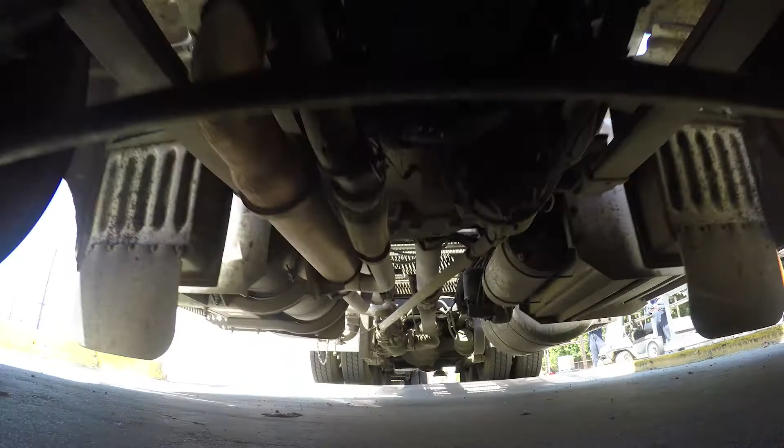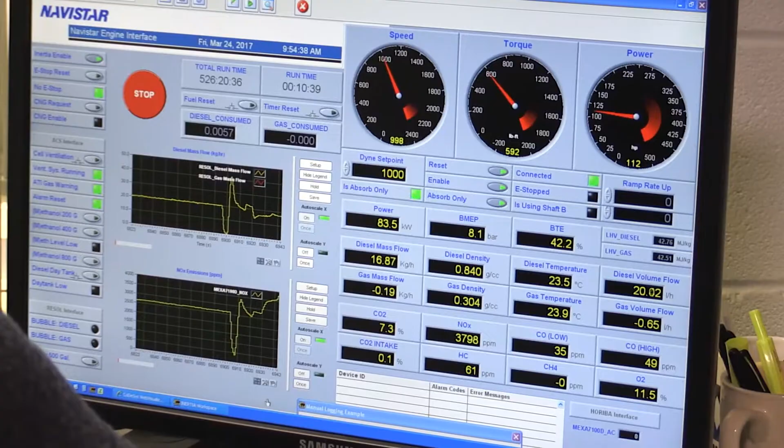And there's a lot of different drivers, both on economic side, interest in terms of environment, and also financial interest. And that's one of the sides that comes with the heavy-duty sector. For example, it's transportation of goods. So there's fuel consumption, and the amount of fuel and what's being consumed by the vehicles represents a cost to the consumer in the end, and also an operating cost for the business.

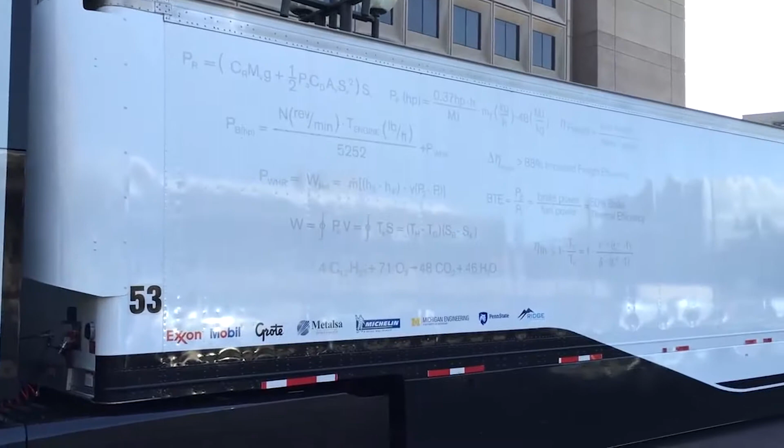The Volvo team, they're incorporating some of the technologies that they explored in the SuperTruck One demonstrator vehicle and engine already in their 2017 product offerings. Their projection was that something like 350 million gallons of fuel would be saved by Volvo customers because of the technologies that got implemented stemming from SuperTruck One already in the 2017 product offerings. So over the next 5 years, 350 million gallons of fuel.

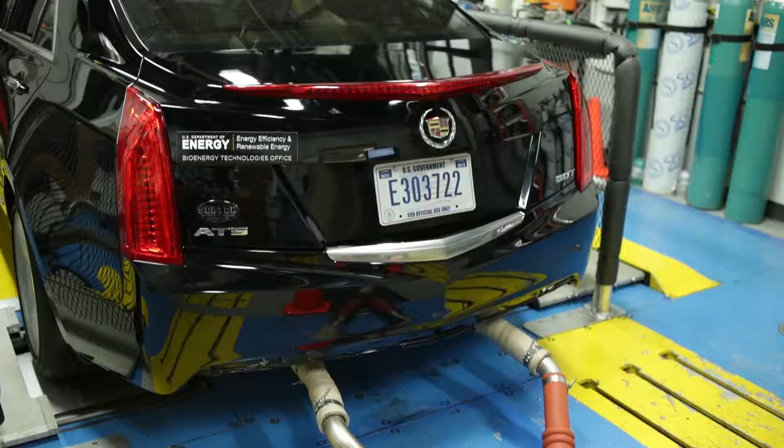That's one of the, I think, the exciting things about Co-Optima. You have VTO and you've got BTO working together to come up with low greenhouse gas fuels, considering the impacts, etc. But then you've got all of us engine engineers also trying to come up with either new engine platforms and strategies or optimizing the current engine strategies to get to this combination of low emissions and high efficiency.

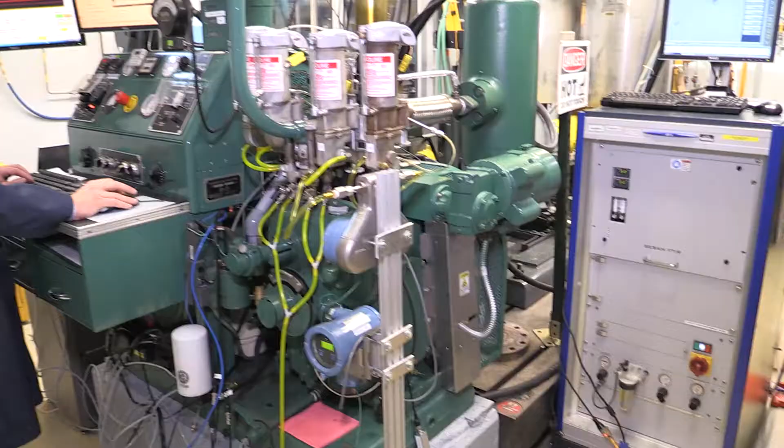The DOE Co-Optima effort looks at taking a bunch of different fuels and blending them simultaneously. One aspect we can look at is using renewable fuels, whether it is ethanol, isobutanol, butanol, or any other renewables, to best extend the efficiency of the engine, which then ultimately improves the fuel economy for the end user.

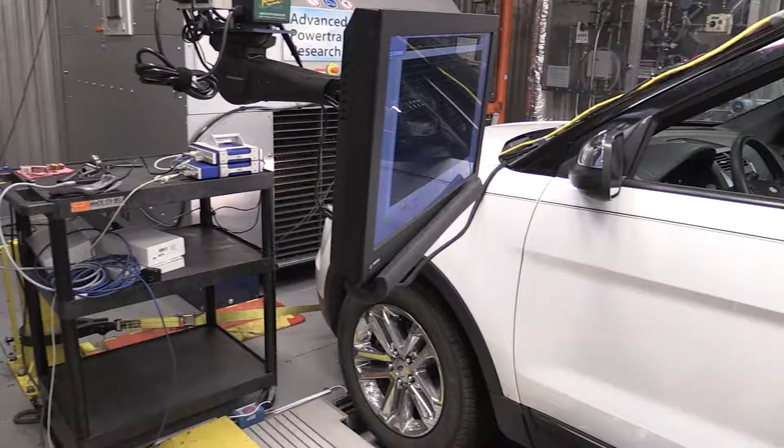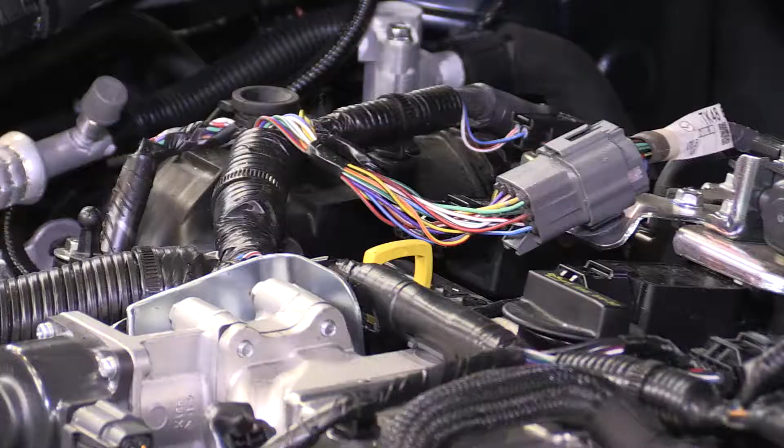We're basically going to a new generation of fuels that we have very little experience with in practical devices. And in particular, we don't know if those fuels will work or not within the real situation, the engine. So we're going to use models, in essence, to screen those fuels in advance and to find the fuels that work with these different combustion modes, whether they're conventional spark ignition or the advanced combustion modes that will also be explored during Co-Optima.

Normally we just have a little bit of sample. So we want to quickly tell people what is the ignition performance of the fuel. Is this suitable for running certain engine conditions, right? So we just want to use a little bit of fuel and quickly tell people the ignition performance.

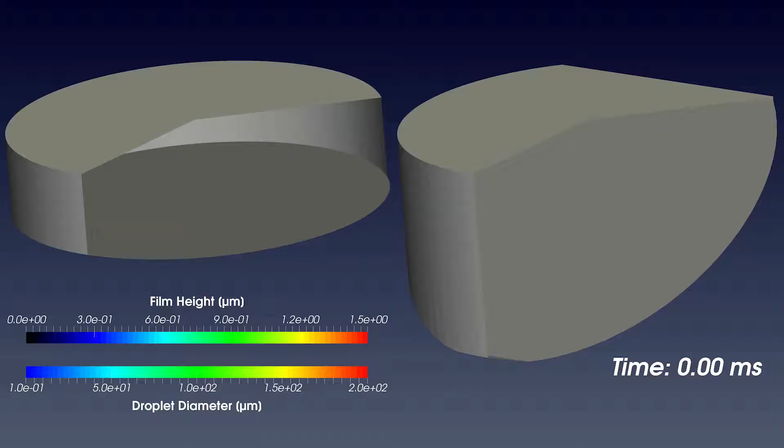It's much less costly to identify the fuels, especially in exotic conditions that might be interesting for future combustion device designs. And so if you can screen the fuels and conditions that are interesting, you can ignore the ones that are not.

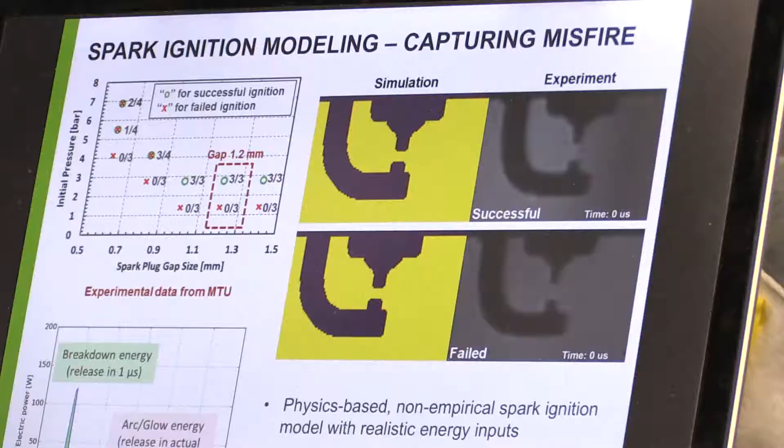It's a process. So the process starts with the fuel, and once we have the fuel, we try to test the fuel in a spark ignition engine setup, in a compression ignition engine setup, and we generate data. Being in a National Lab, our strength is to actually generate the experimental data and the simulation results. These experimental data and the high fidelity simulation results actually go into a database.

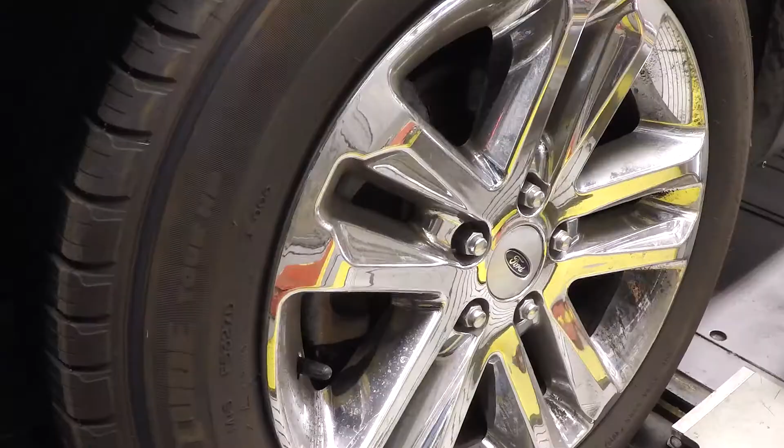OEMs can actually access this database to learn what experiments have been done, what simulations have been done, and that's going to actually help them guide what fuels are suitable for their engine or what modifications need to go in the engine.

Everybody knows about all the work on electric and hybrid vehicles, but it's also known that conventional engines, the engines that you have in your car today, those engines will be around for many decades yet to come. And what we are doing here on the Advanced Ignition project is basically to make those engines better. So the development effort on those conventional engines is not done, it's not finished, it's continuing.

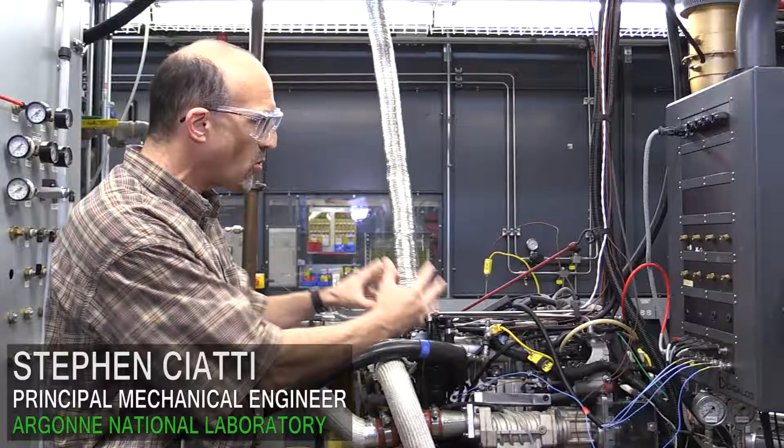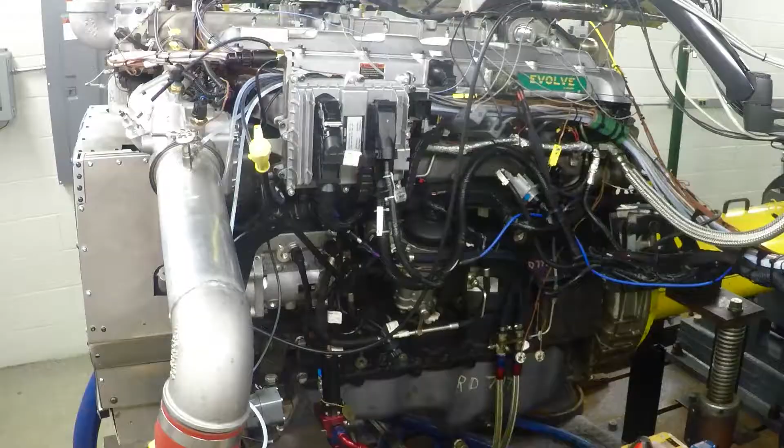So having the ability to have a strategy for running this engine and this combustion system on a variety of different fuels and fuel blend stocks, being able to take the same approach so that we can compare all of these different fuels and operating strategies, apples to apples to apples, every time, all the time, consistently. That's why we do this kind of work at national labs and universities. This is where the understanding portion of all of this science comes from.